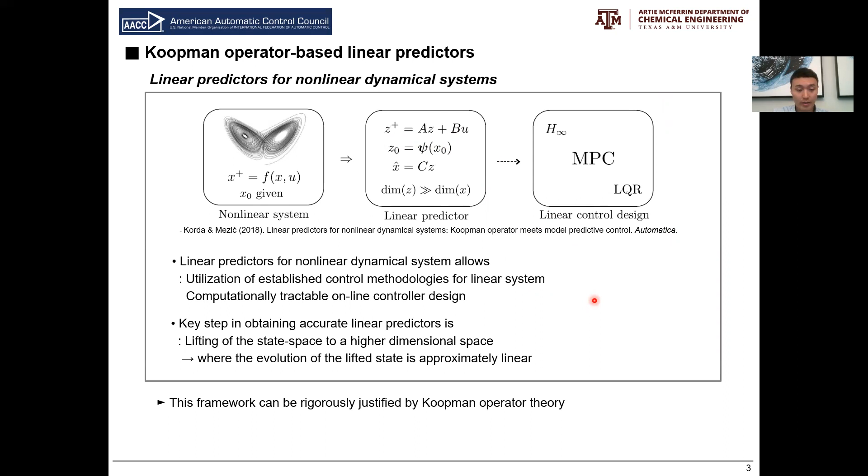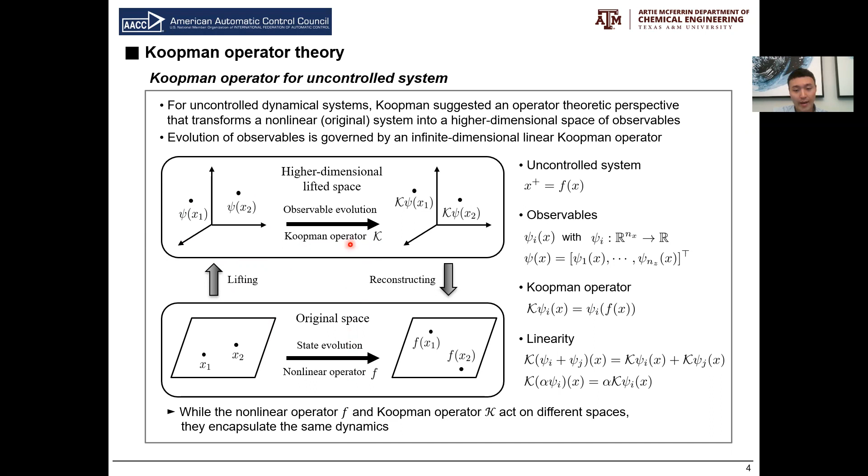For uncontrolled dynamical systems, Koopman suggested an operator-theoretic perspective that transforms a nonlinear system into a higher dimensional space of observables. In this space, evolution of observables is governed by an infinite-dimensional linear Koopman operator. While the nonlinear operator and the Koopman operator act on different spaces, they encapsulate the same dynamics. The particular interest is not the Koopman operator itself, but a proper linear predictor.

Several algorithms are developed to approximate the infinite-dimensional Koopman operator. The extended dynamic mode decomposition is one of the most commonly used algorithms. In EDMD, controlled system dynamics is considered by introducing a vector of observables consisting of functions of x and u, and the Koopman operator associated to the evolution of this observable can be described as follows.

Then an approximation of the Koopman operator is derived by solving the optimization problem with a time series data set. But since the dynamics of the input variable is not needed, the optimization problem can be reduced as follows. And then the analytical solution for the lifted state space can be derived.

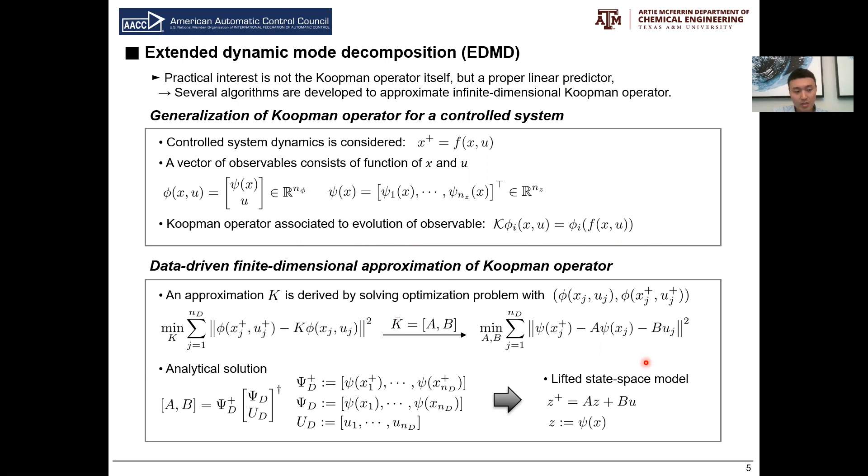There are several Koopman-based MPCs that apply the lifted state space model from EDMD that have been developed, but let me introduce the Lyapunov-based MPC first. The MPC applies Lyapunov constraints to the optimal control problem based on an explicit stabilization control law and Lyapunov function. The first Lyapunov constraint ensures that the closed-loop system stays within the stability region.

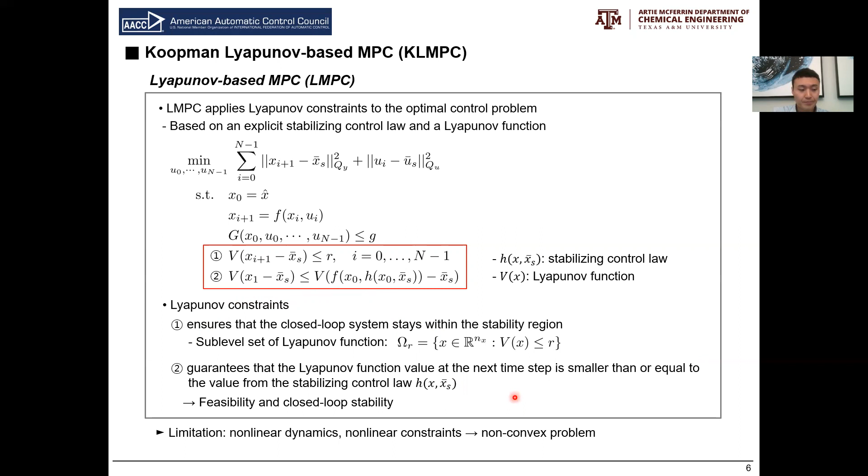And the second constraint guarantees that the Lyapunov function value at the next time step is smaller than or equal to the value from the stabilization control law. By this, the LMPC scheme can ensure the feasibility and closed-loop stability of the control system. However, there is a limitation that due to the nonlinear dynamics and nonlinear constraints, the optimal control problem becomes a non-convex problem. To handle this limitation, the Koopman-Lyapunov-based MPC is developed to integrate EDMD and LMPC.

In this scheme, the nonlinear dynamics is approximated with a linear predictor via EDMD, and nonlinear functions in Lyapunov constraints are absorbed into the observable function library. By this, the Lyapunov function value can be simply derived from the lifted state values.

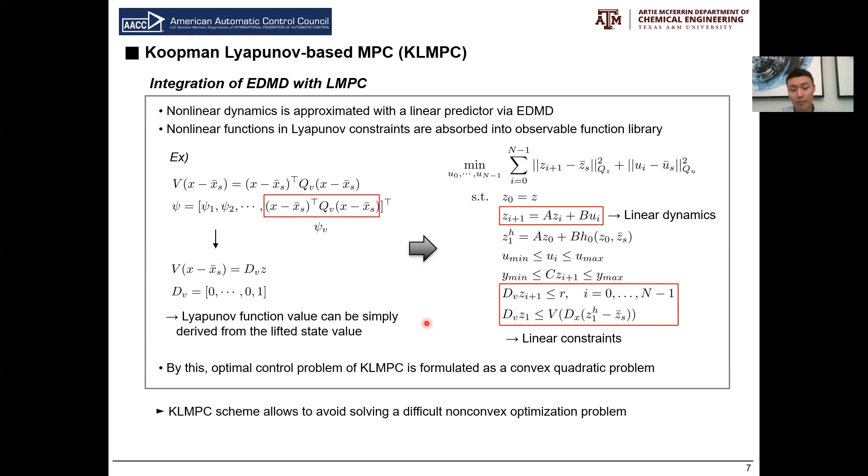By applying this formulation to the optimal control problem, the nonlinear dynamics and the nonlinear Lyapunov constraint can be reformulated as linear dynamics and linear constraints. By this, the optimal control problem of KLMPC is formulated as a convex quadratic problem. Consequently, the KLMPC scheme allows us to avoid solving a difficult non-convex optimization problem.

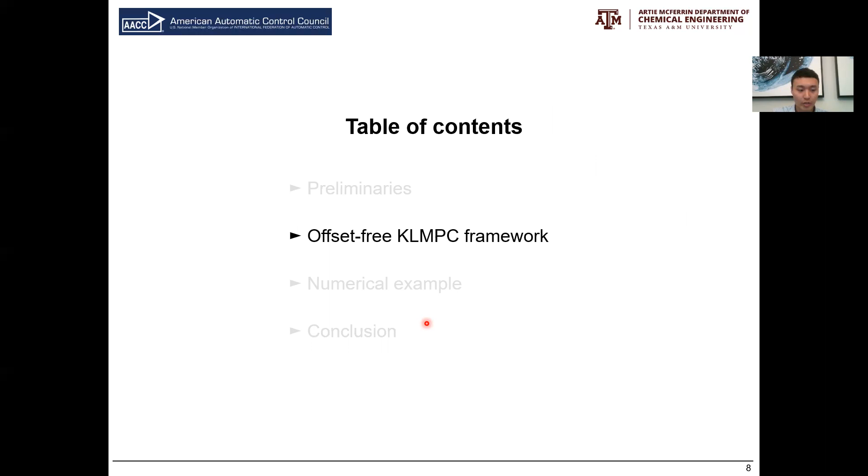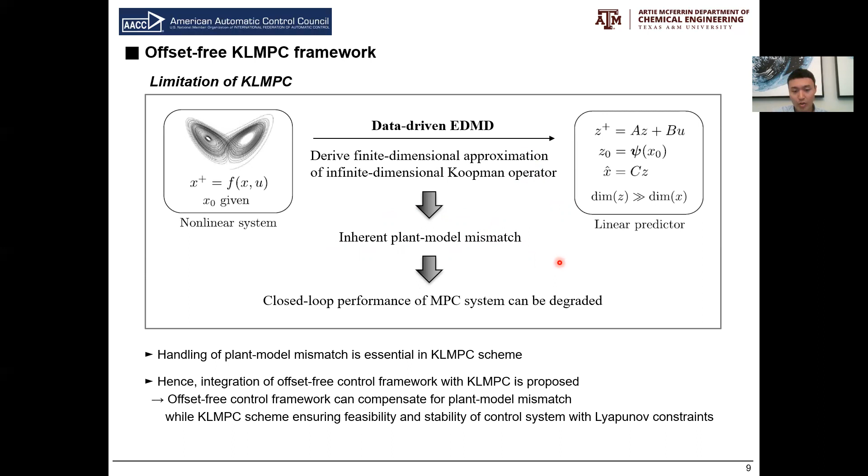This section presents the proposed offset-free KLMPC framework. KLMPC has a limitation since the data-driven EDMD derives a finite dimensional approximation of the infinite dimensional Koopman operator. Thus, inherent plant model mismatch occurs, and this can degrade the closed-loop performance of the MPC system. Therefore, handling this plant model mismatch is essential in the KLMPC scheme. Hence, the integration of offset-free control framework with KLMPC is proposed in this work.

The disturbance estimator approach is one of the most commonly used offset-free control schemes. Therefore, we apply the disturbance estimator approach to the EDMD model. In this scheme, the disturbance dynamics and disturbance influence on lifted state and output are augmented to the lifted state space model obtained by EDMD.

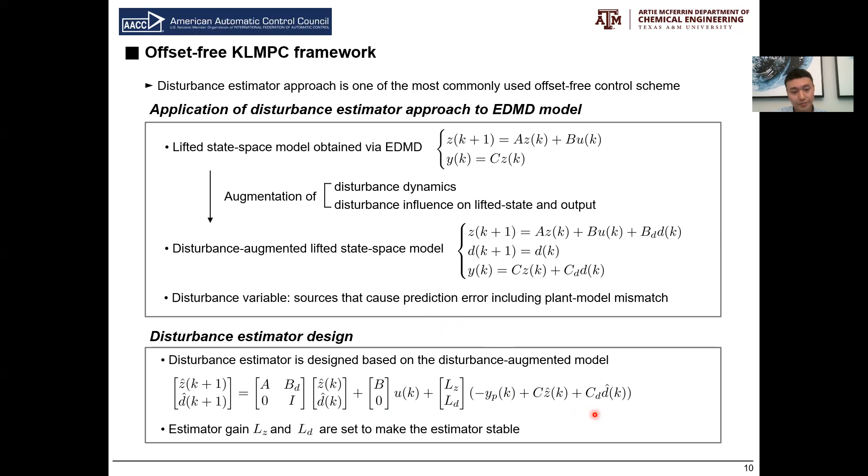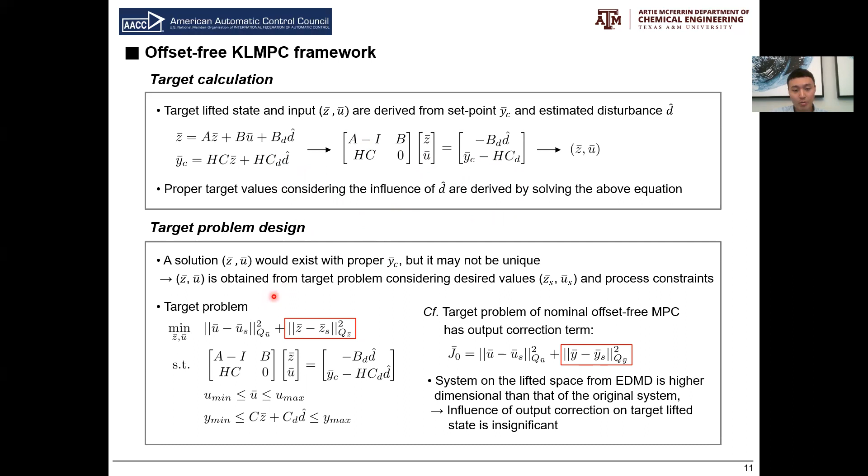Then the target lifted state and input are derived from the set point value and the estimated disturbance value by utilizing the set point tracking condition equations. And then the proper target values considering the influence of disturbance are derived by solving this equation. Of course, the solution would exist with a proper reference signal value, but it may not be unique. Therefore, the target pair is obtained from the target problem considering the desired values and the process constraints.

Then, given the lifted state and input targets from the target problem, a finite horizon optimal control problem can be brought into a lifted state regulation problem with Lyapunov constraints. In this formulation, the equilibrium point of the Lyapunov function and stabilizing control law are determined by the current target Z bar. And since the target of the optimal control problem, Z bar, is continuously updated over time by the target problem as the disturbance estimate is updated from the estimator, the Lyapunov function and the stabilizing control law also need to be updated over time.

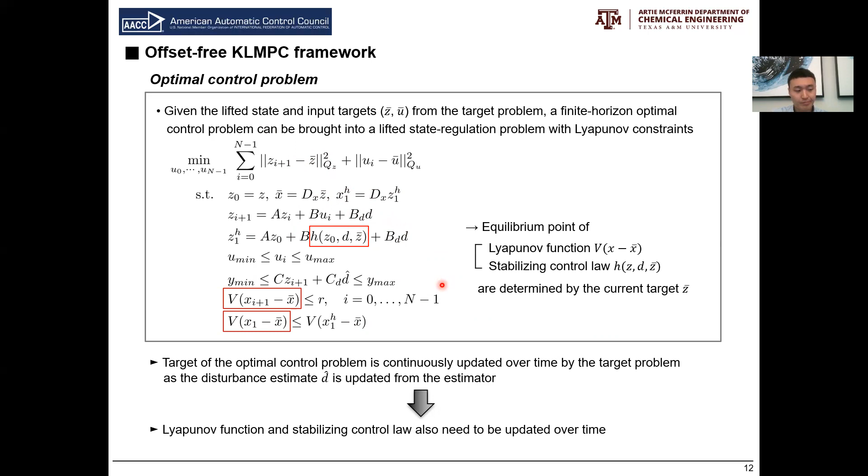The updated Lyapunov function can be reformulated as an affine function of the lifted state by applying each term reconstructed by the lifted state. And the updated Lyapunov constraints can be reformulated as linear constraints by applying the affine form of the Lyapunov function. The stabilizing control law is formulated based on state feedback under disturbance, and N bar and KD are derived from the set point tracking condition at steady state.

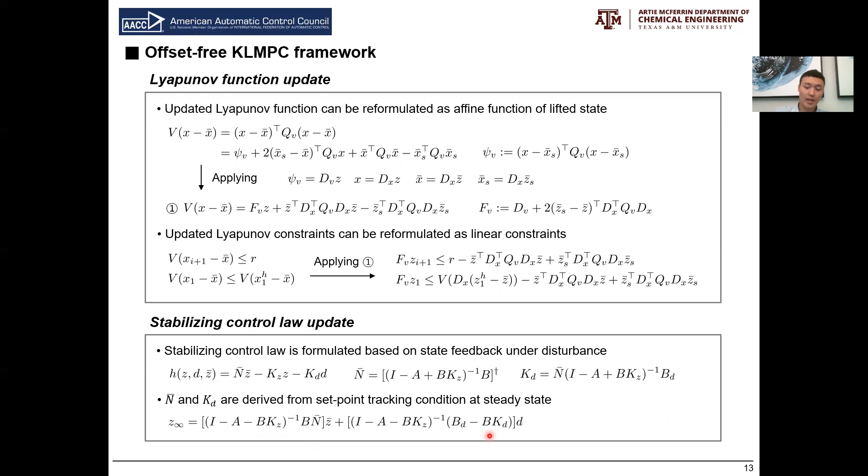This flow diagram illustrates the offset-free system. The disturbance estimator estimates the lifted state and disturbance from the plant measurement, and then the target lifted state and target input are derived from the target problem with the disturbance estimate and the reference signal. And then the optimal input for the plant is derived by solving the optimal control problem with Lyapunov constraints, which is updated as in the previously introduced procedure.

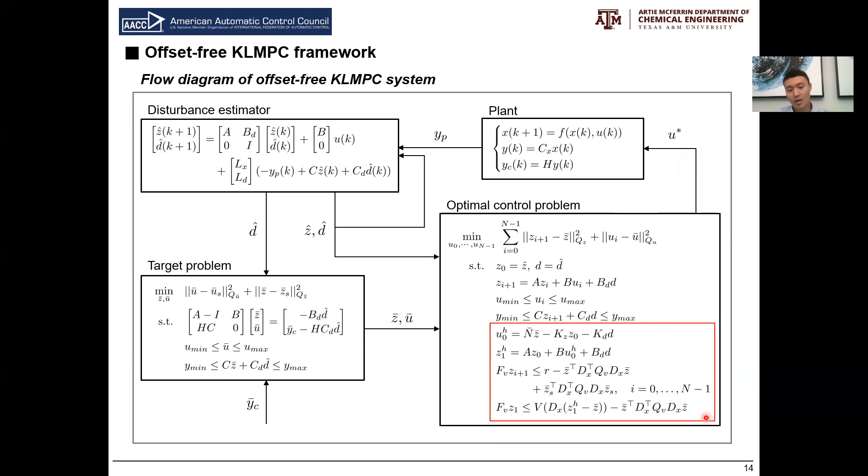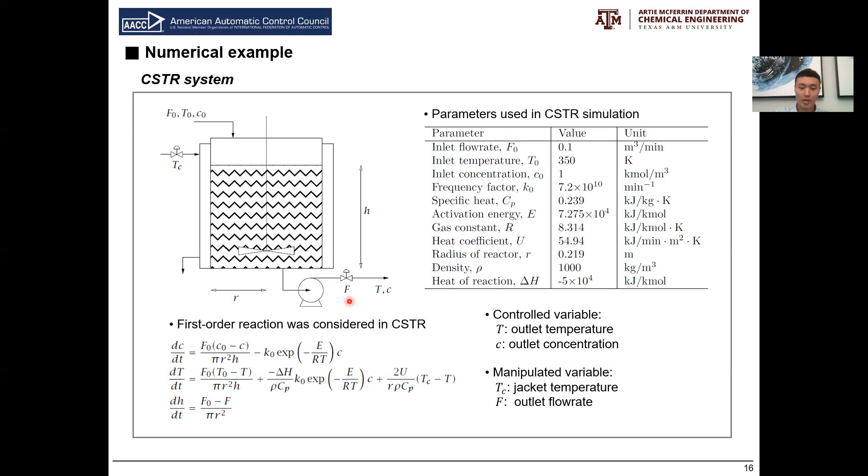This section presents a numerical example. The CSTR system was utilized as the virtual plant for the numerical example. In this system, a first order reaction was considered, and the parameters in this table are used in the CSTR simulation. In this simulation, the outlet temperature and outlet concentration are set as the controlled variables, and jacket temperature and outlet flow rate are set as the manipulated variables. Then a lifted state space model was identified through EDMD. In this EDMD, this observable library was used, and the time series data set generated from the operation of the virtual CSTR was used.

And then a series of step inputs in jacket temperature and pulse inputs in outlet flow rate are applied for validation of the derived EDMD model. This figure shows the resultant output trajectories. As you can see, while the lifted state space model seems to properly predict the behavior of the virtual CSTR for the most part, the prediction error still exists at some parts due to the inherent plant-model mismatch.

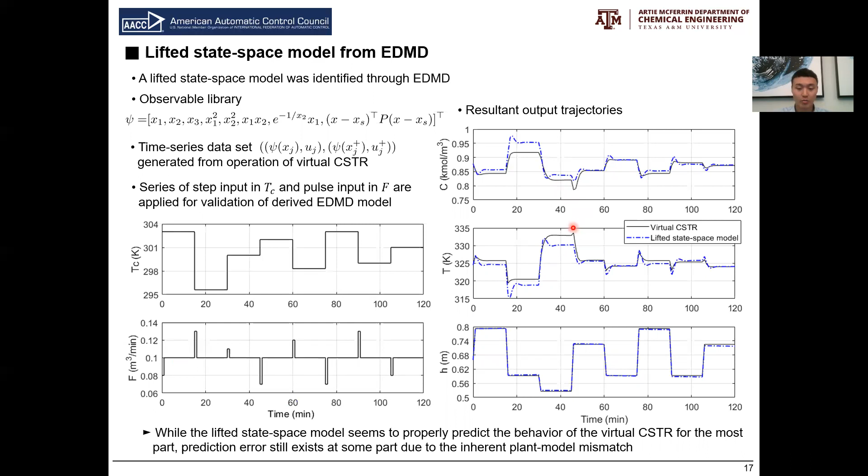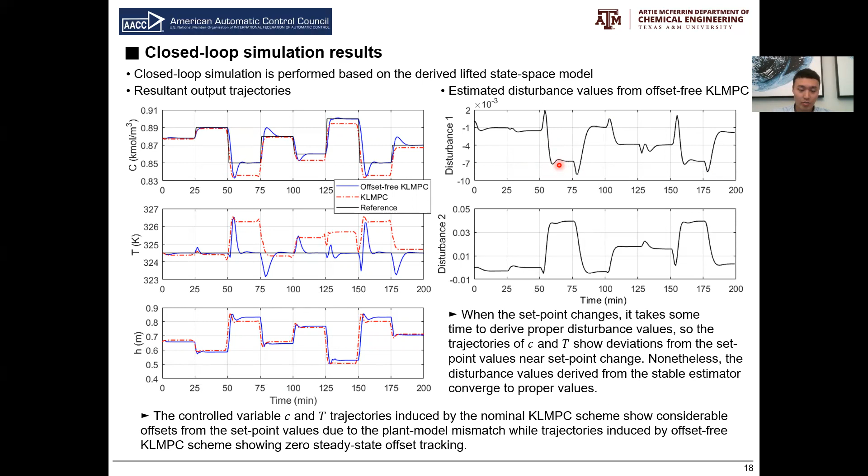This figure shows the estimated disturbance values from offset-free KLMPC. As you can see, when the set point changes, it takes some time to derive proper disturbance values. So the trajectories of C and T show a deviation from the set point values near set point changes. Nonetheless, the disturbance values derived from the stable estimator converge to proper values. So that's why the proposed offset-free KLMPC scheme can achieve the zero offset tracking property.

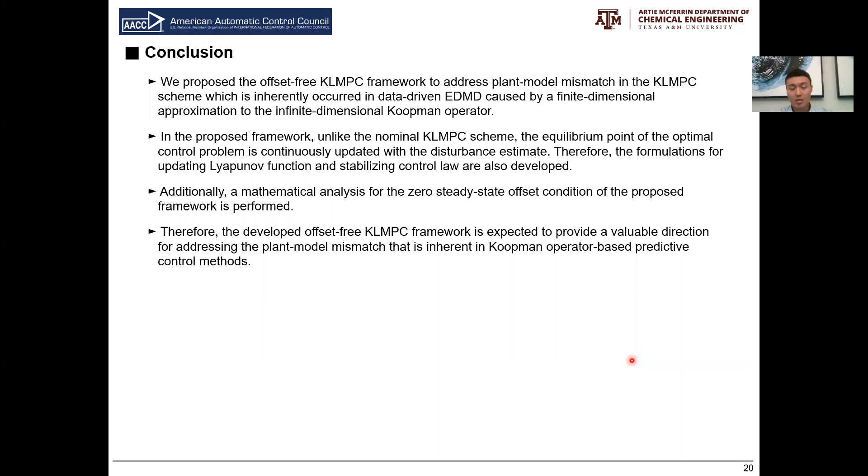Conclusion: we propose the offset-free KLMPC framework to address plant-model mismatch in the KLMPC scheme, which is inherent in data-driven EDMD caused by a finite dimensional approximation to the infinite dimensional Koopman operator. In the proposed framework, unlike the nominal KLMPC scheme, the equilibrium point of the optimal control problem is continuously updated with the disturbance estimate. Therefore, the formulations for updating the Lyapunov function and stabilizing control law are also developed. Additionally, a mathematical analysis for the offset-free steady state condition of the proposed framework is performed. Therefore, the developed offset-free KLMPC framework is expected to provide a valuable direction for addressing the plant-model mismatch that is inherent in Koopman operator-based predictive control methods.